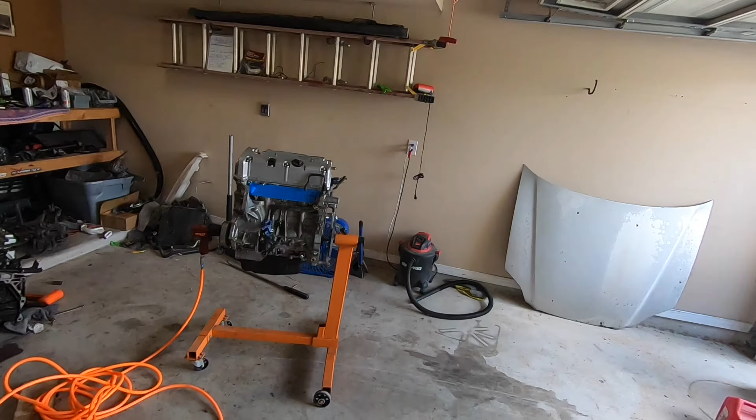What's up, guys? Today I'm going to do the VTEC killer setup, and I'll break it down step by step to the best of my abilities. That way I can help you guys who don't have a true VTEC K-series and then turn it into something that's what we call a VTEC killer, which rides on the VTEC lobe all the time.

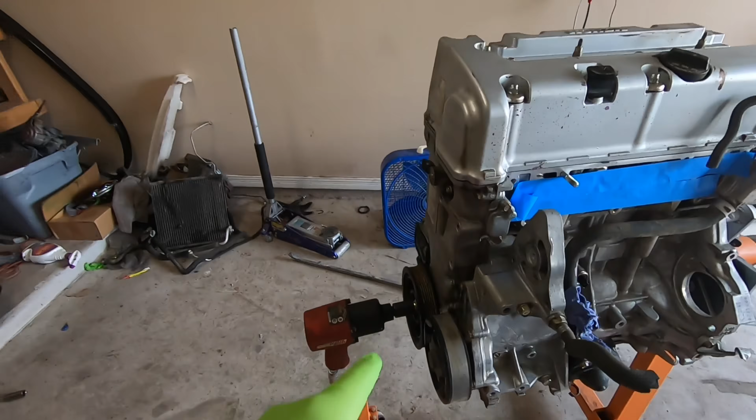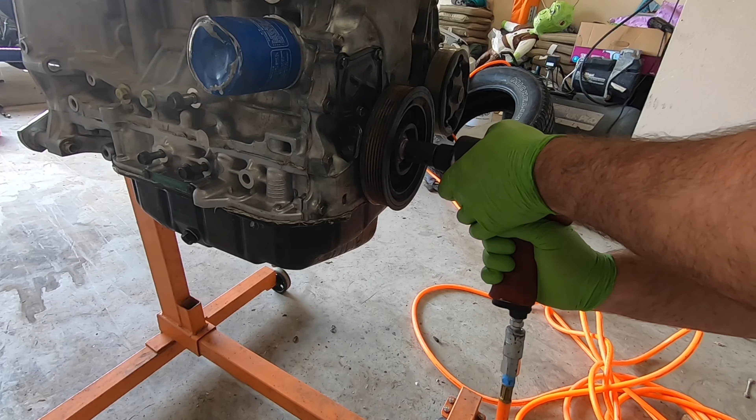So first things first, let's hope that the hardest part of the job goes smoothly. Got the air compressor pumped up, and I got the air gun ready to go. So first things first, we're gonna take off this crank pulley. That wasn't too bad. Air compressor for the win. All right, so we got that off. Wasn't too hard. We got the crank pulley. Just wiggle it. Some people I've seen have to pry it. I did not. There's a woodruff key, so you want to just be careful.

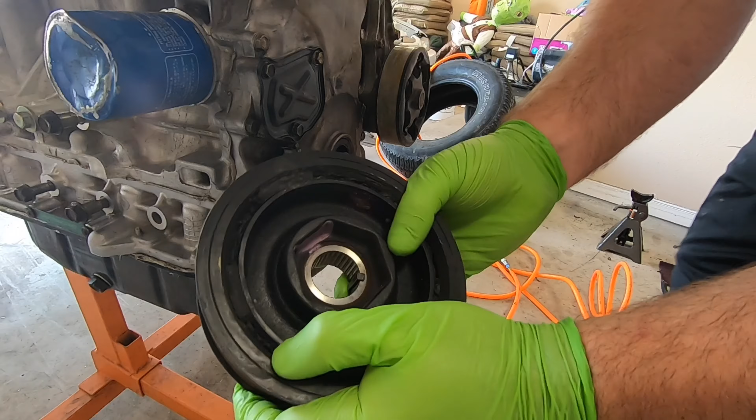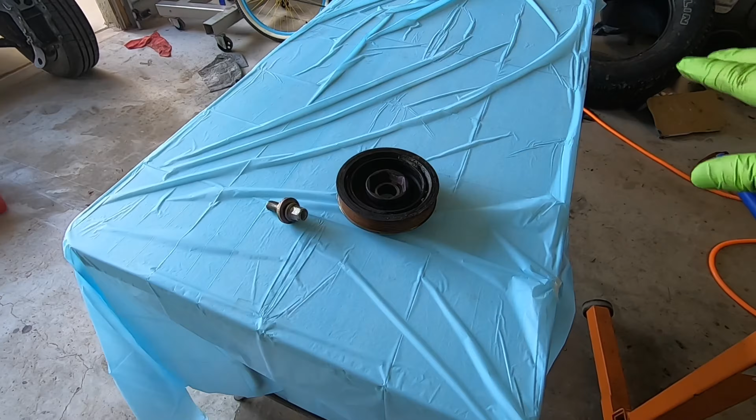And I set myself up with a very fancy tablecloth. I think this is going to help organize everything. I recommend, if you're going to tear down a motor like this, I mean, I'm not doing it too crazy, just the top end, but you still want to have some kind of organization so you don't lose stuff. So now that I got that off, I'm going to flip the motor.

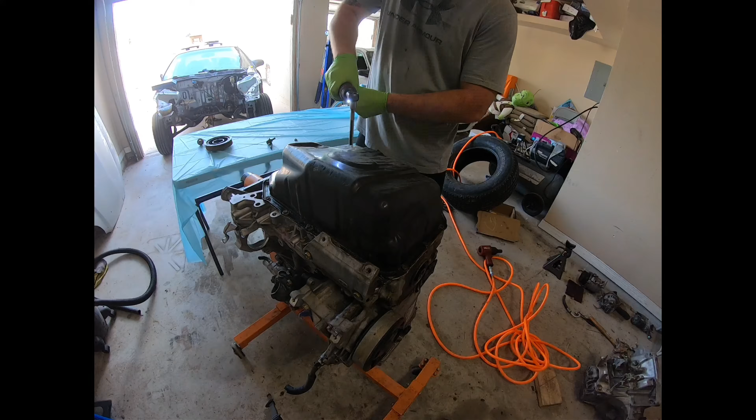And while I have the top end apart, I'm going to reseal this oil pan, because as you've seen previously, I actually took off the oil pan to inspect it. So I'm going to reseal this so that when I do put some oil in here, because I gotta lube the cams, I don't want any kind of oil to leak. So I'm gonna do that right now. All right, so as you can see, there's RTV all around the pan.

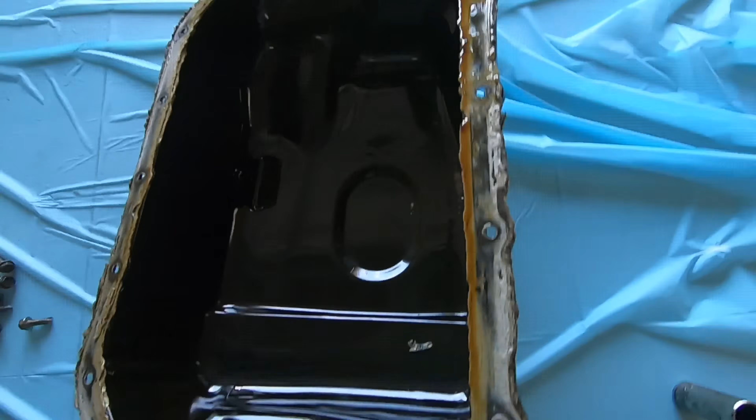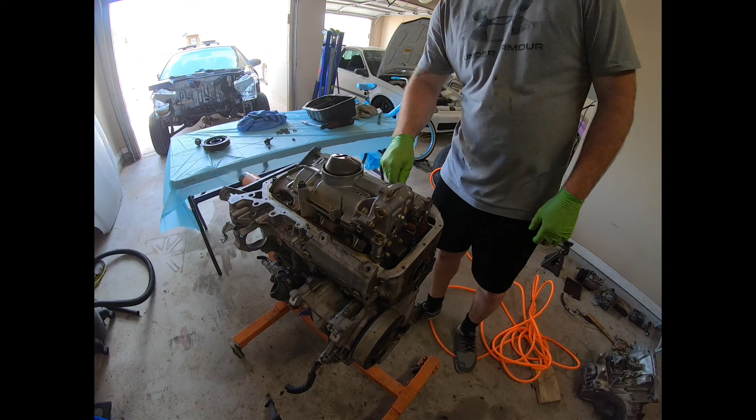So go ahead, razor blade all this off, clean it up nice, and then I will put back the pan. Actually, I think I need to keep the pan off to get this cover off. Poop. But I'll clean it anyways. I ain't gonna lie, I just spent I don't know how long cleaning the RTV off the oil pan. It was necessary, but I got it clean. So now I'm going to take off the valve cover.

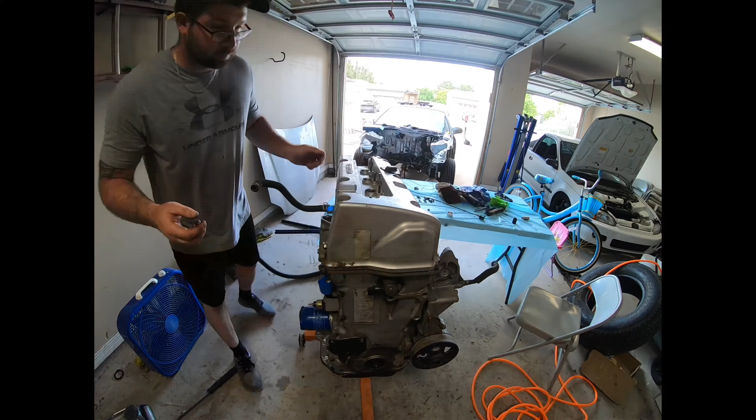All right, next I'm gonna do the timing cover. There's 12 bolts all the way around, and then the VTC solenoid. And you got the cover here, but it doesn't have to come off just yet. All right, so now I got the timing cover off, and I want to set the motor to top dead center. So I'm going to turn it counterclockwise until the timing marks match.

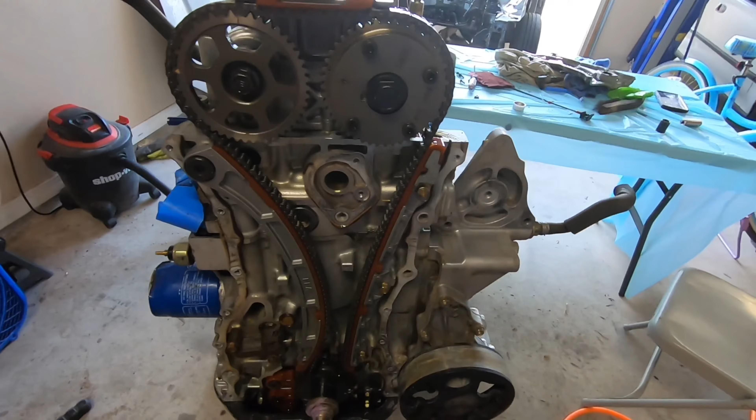I tried turning it. I realized I have tape covering exhaust and intake. It was causing too much pressure, made it really hard to turn. So, all right, here we go. Turn it over till we get these lines to match. So we got these two cross hatches matching.

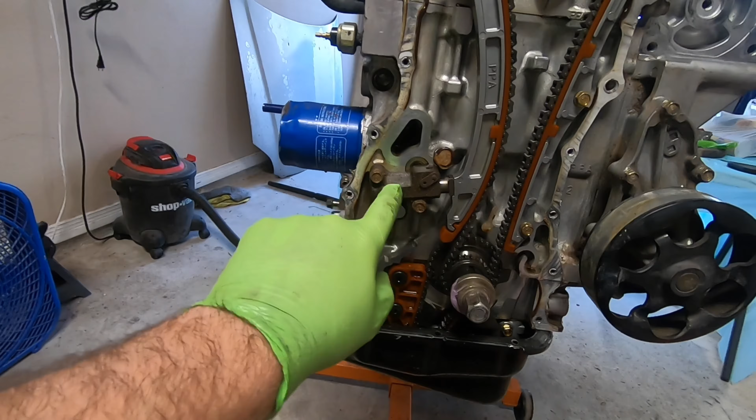Let's take it off the stand. Check where we are here. A little bit right there. All right, just double checking timing here. So we got these two lines matched up, and we got the arrows pointing up and down. So that's TDC. So right now I'm going to remove the timing tensioner, and I'm going to start working on getting the chain off, and after that we'll work on getting the cams off. I just ordered one from AutoZone and it'll be here tomorrow, but let's get to it.

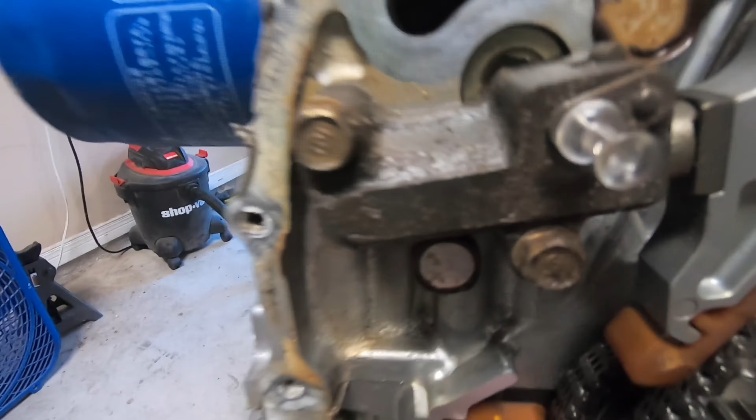All right, so next I got this little area lined up with a thumbtack in. Everyone says a thumbtack fits, so hopefully that works. Let's see. It's kind of hard with the one hand. All right, I'm just gonna loosen that and take it off.

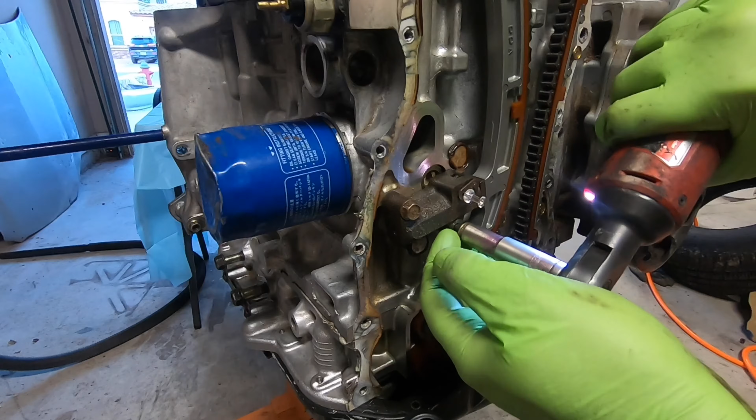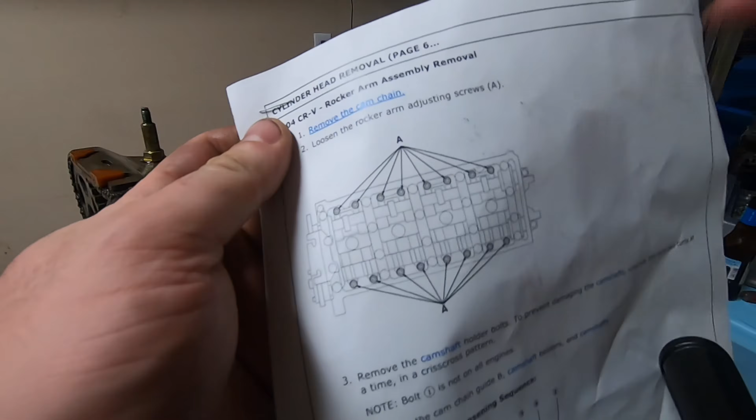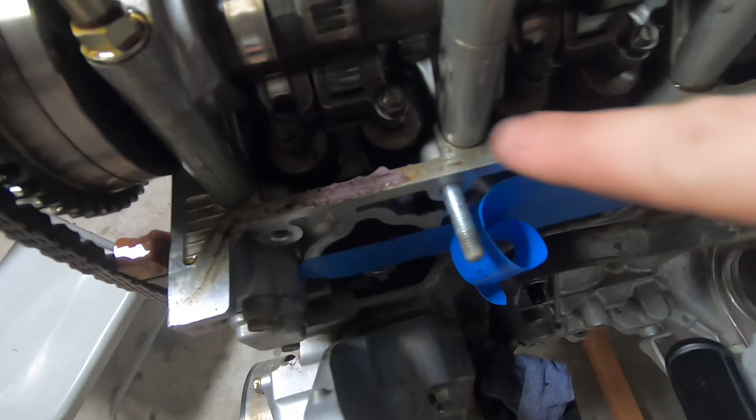All right, so according to the directions, it says to loosen the rocker arm adjusting screws. So if you ever did a valve adjustment, it is these on each part of the rocker. So I'm going to go ahead and loosen these. I don't know if it's necessary, but I'm gonna do it because it says it.

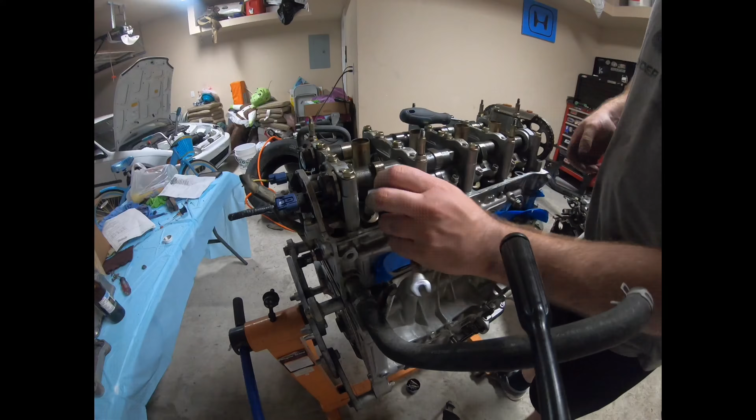All right, so next step is to follow the holder bolt loosening sequence. I don't know how good you guys can see that, but that is it. I will try to put a screenshot in there that way you can see it, but here it goes.

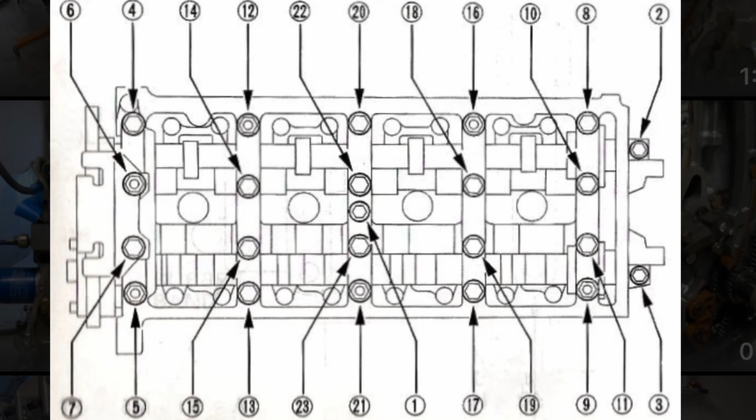Alright, so yesterday I left off, I loosened up all the bolts for the cam cap, and then my GoPro died. So now I will be removing them, removing the cams, cam gears, and then the bottom assembly for the roller rockers. Some kind of order like that. So let's get. Alright, so that's one. And they're all marked 1, 2, 3, 4, 5, so it's really kind of hard to mix things up.

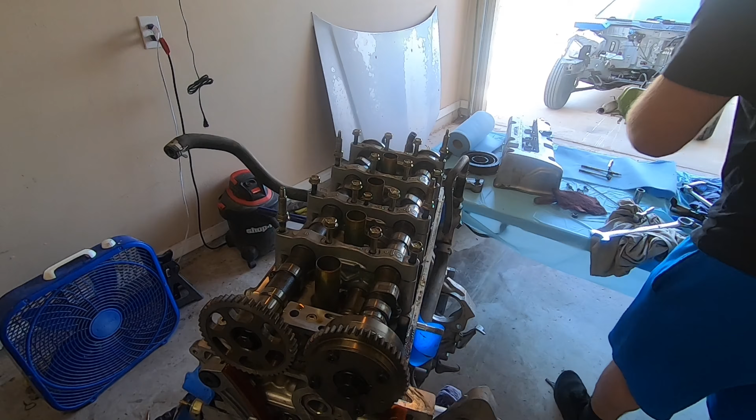Well, I elected to impact this off camera. Some people say not to impact it. I decided to impact it because I don't have any other choice. I think people say either way. It's not a big deal to me. I think it's gonna be just fine. So I'm gonna do the same thing on here. I think that's a 14.

All right, I got the 14 on the exhaust side. And I'm just gonna zap. It's a 24 wrench to hold the cam, by the way. And I got the cam gears. I don't think I will impact them back on. That would be silly. All right, I'm gonna get these cam gears off. Look how easy. I thought it was gonna be tough.

So that's the intake cam gear. And the exhaust. Same thing, real easy. Cool. So these cams are now done. Put them off to the side here.

So next, from my experience, these that are attached to the head are super difficult to get off. At the junkyard, I did not have anything to do it, but after looking online, it looks like if I just get a piece of cloth or something and a pry bar, they should come off. So I'm gonna get my cloth and pry bar and see how that works. All right, so this is kind of nerve-wracking. I got a ginormous pry bar and a t-shirt.

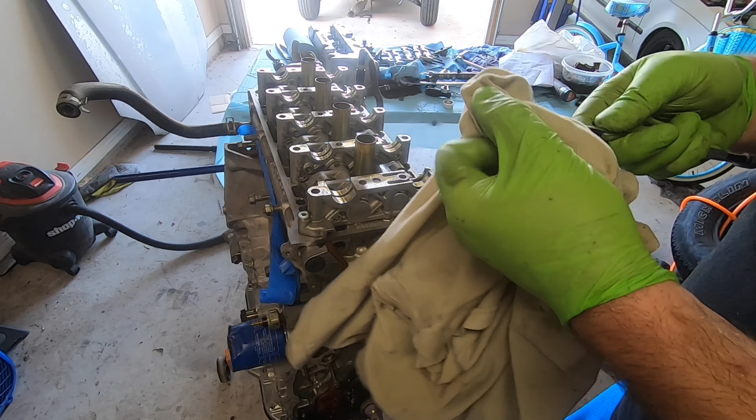It is coming up. All right, kind of at a loss as far as pry bars go. I have a 1/4 inch extension, kind of fits in there. Oh no, it marred it just a bit. See if I can work it on the other sides. There are better ways of doing this, folks. That is a fact.

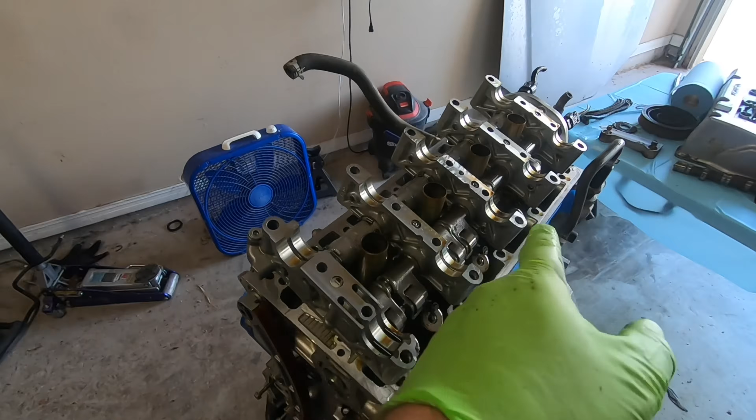All right, so I have it pretty much off, but I just want to explain how to get it off. So there's a place here you'll be able to pry, here, here, and also here. So what you want to do is just kind of pry them up in each corner and then just wiggle it, wiggle it, wiggle it. And it took a little bit more work for me because I don't have a proper pry bar, something I do need to get.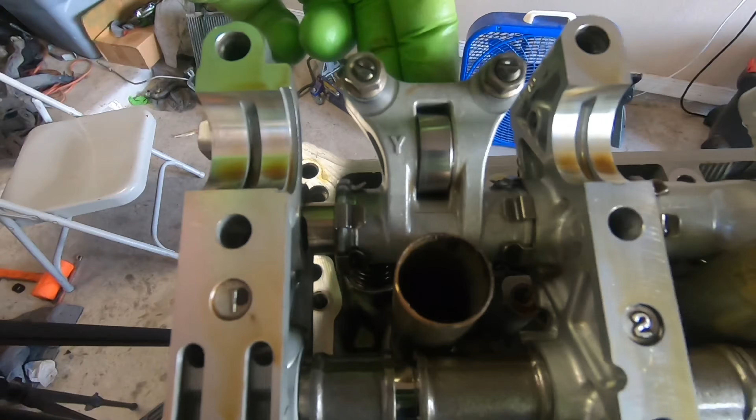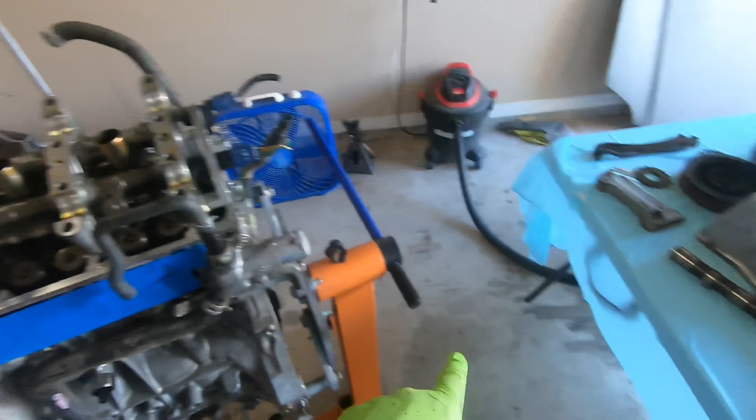When you're doing this VTEC killer setup, don't worry about the springs and stuff popping out of the roller rockers. They're not going to be reused because we are going with a complete set of exhaust rockers from the K24Z3 that look like this, and that's going to be on all 8 intake and exhaust, or 4 intake and exhaust, whatever you want to say. So let's get this whole assembly off. I need to clear some space on this organized mess, and we will start talking a little bit more about why we have to use those exact K24Z3 rockers.

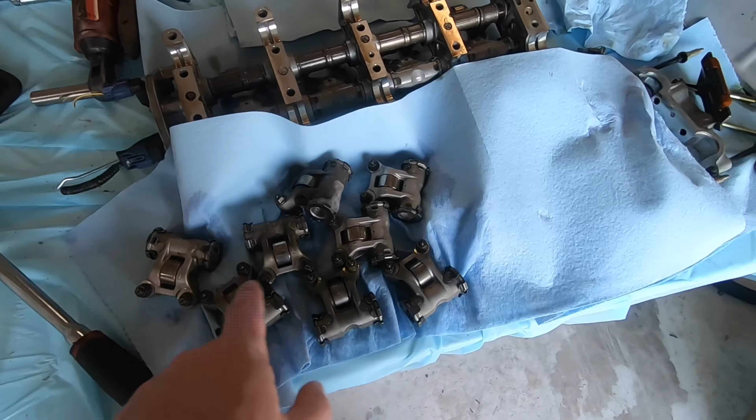All right, so I had these soaking in gasoline for like a day and a half just to cut any kind of grime, and then I just put some degreaser, like some dish detergent, and just ran it through there, and I'm letting it air dry. So now I'll kind of just talk about why we're using these.

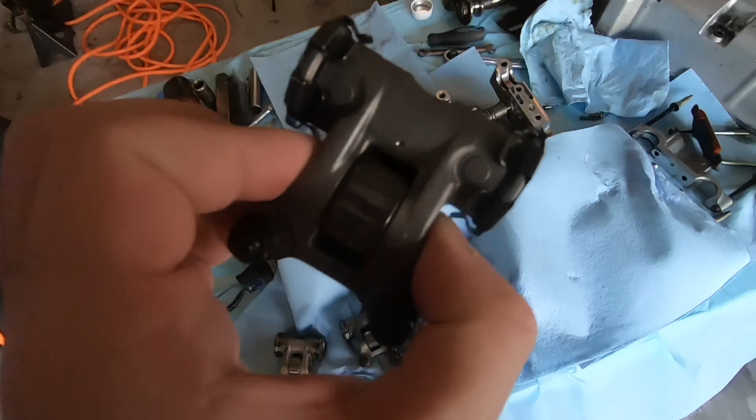So on the K24s and K20A3, it's not true VTEC. So in order to get it, we're gonna run one lobe on the exhaust side, with K20A2 Type S cams. The killer in this is we no longer have to have VTEC engage, but we're going to be riding on that high lobe the entire time. These rockers don't require any kind of grinding. They fit perfectly, and once we have the cams installed, you'll see it does clear these.

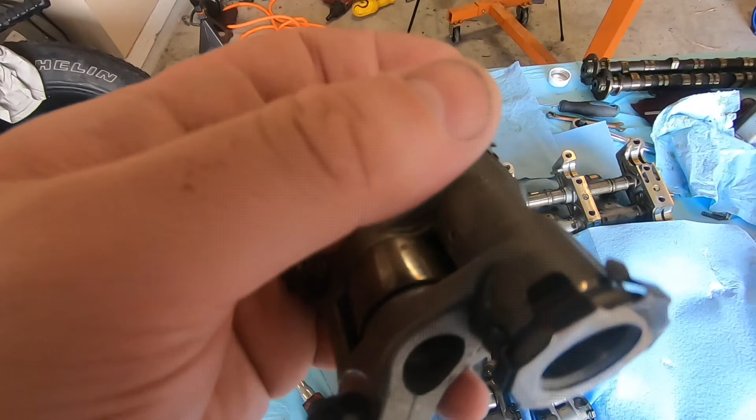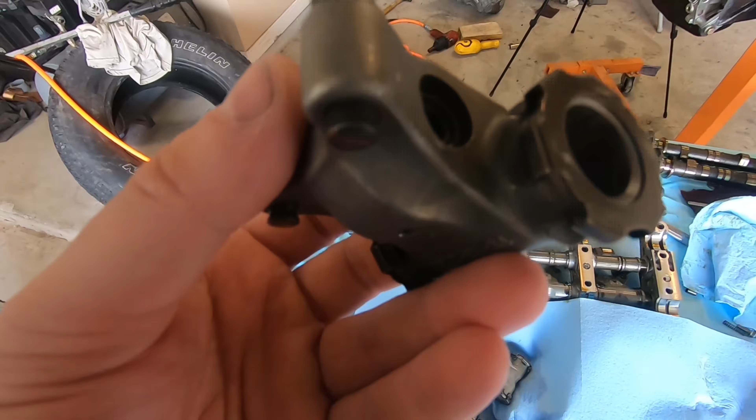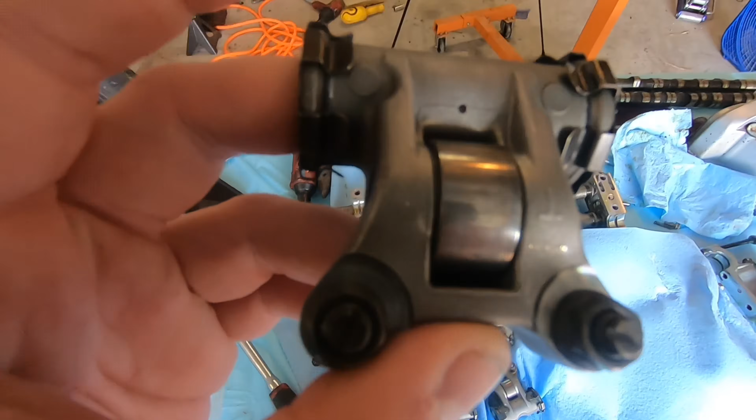Some people use the exhaust rockers from other non-VTEC engines, and you have to grind them. So I think it's like Accord EX from like 2011 and up. I'm not exactly sure on those years. And the second gen TSX uses the K24Z3. And you could find these pretty easy at the junkyard. I ended up having 4 that I got with the motor. They didn't charge me for whatever reason.

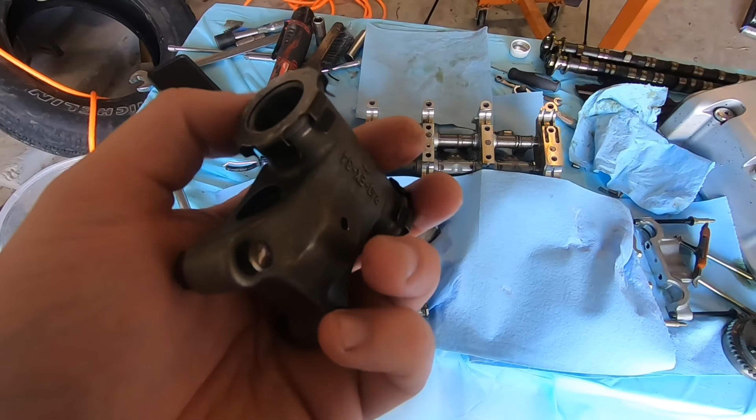And then another set of these were $7 each, so it came out to like 20 something. Just to get this in the oil has been a super tedious process. I started off soaking it in gas for a day and a half, like I mentioned. It still had some grit.

Then I went down to some soap and some detergent. That cleaned it up pretty good. Let it air dry for a good while. Then I took some brake clean, just sprayed around the rollers, turned them, let that air dry, checked them, verified they were dry, and now I have them sitting in 5W20.

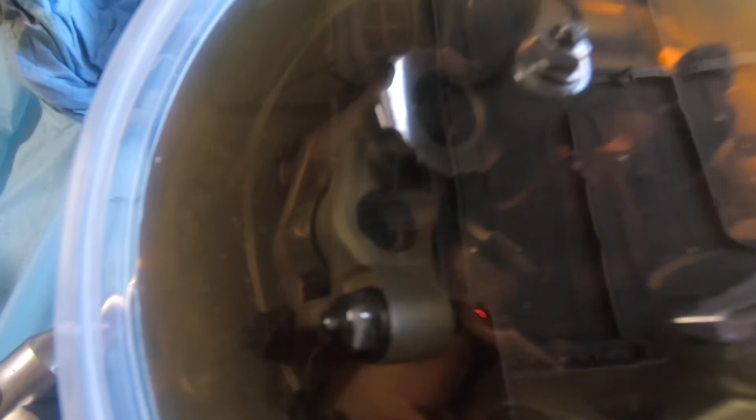And as you can see, let's see if we can capture some bubbles. There we go, some bubbles there. And that's just the oil filling up all these air gaps. So it's super important if you get these from the junkyard or whatever. In my case, they did get some grit in them. And in most cases, I would say you wouldn't, as long as the motor was taken care of and you put them in a bag or something.

But unfortunately, I didn't. So learn from my mistakes, but also it doesn't hurt to be overly cautious in cleaning them and oil them and all that good stuff. So I'm gonna let this sit for a good while. Once these I feel are good to go, we'll start working on assembling them.

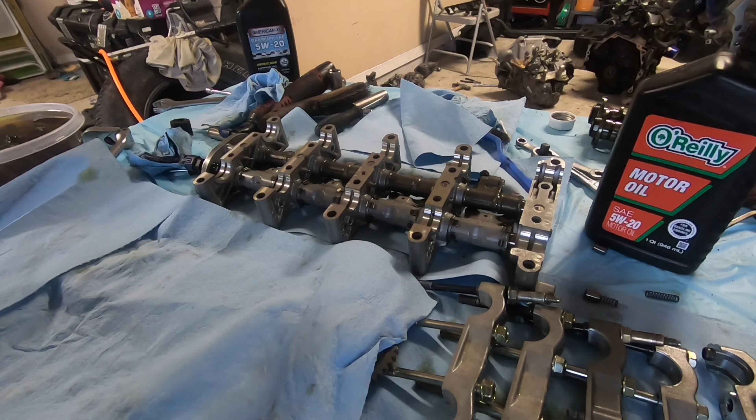So the rockers are pretty much nice and soaked. In the time that it'll take to do this, I think I'll end up taking it off. So I'm gonna take these apart. Like I said, they are labeled. And we're not worried about these or the springs because we're using all new rockers, and they don't even have the springs like the VTEC side does.

So just take off each holder. I'll just place it over here. Put all the assembly elsewhere, not like I'm gonna need it. As uniform as I can. Alright, so we have all the old stuff over here. Probably put it somewhere else. And then I'm just going to clean off all this and then start sliding everything on.

Alright, so I think the easiest way to go about this is to put the number 1 holder and just put some oil on it. Place

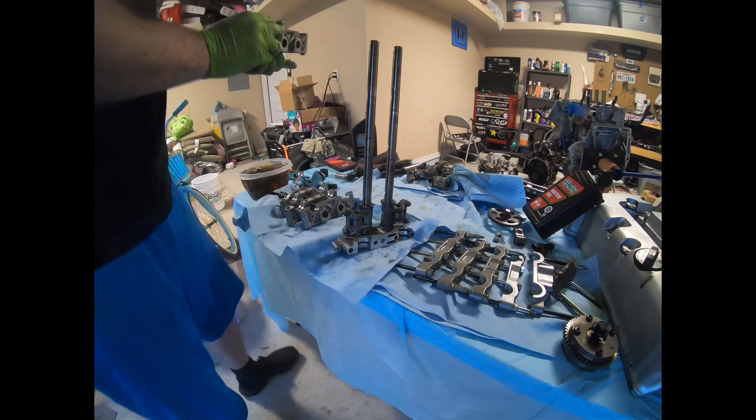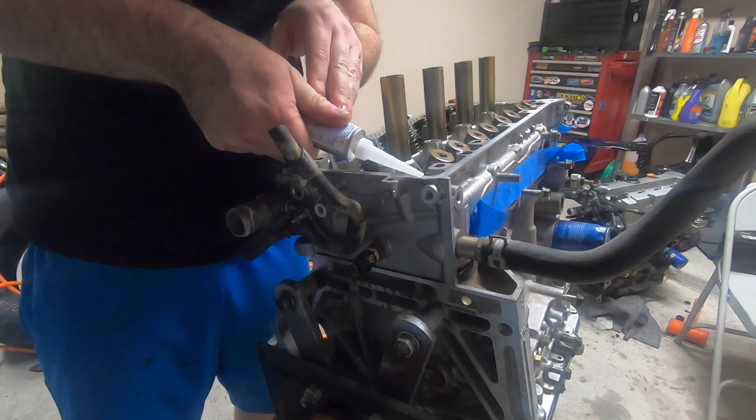for the number 5 cam rocker arm plate. So put a little RTV there. And the RTV, I'm not using Honda Bond, I'm using Ultra Gray Permatex RTV. It's basically the same. I don't need to be spending extra money on something like that when I don't need to.

I think we're just, oh, there we go. So we have it on. I think I'm just going to tap these in and I'll start torquing everything down.

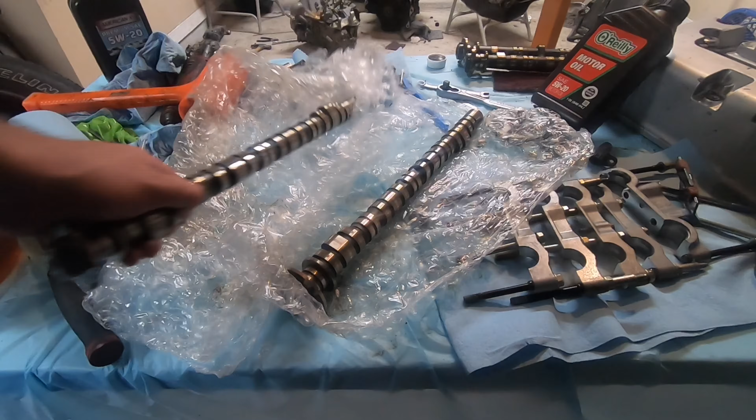So the next part of the VTEC killer setup is these 02-04 Type S cams, intake and exhaust. I got these off eBay without the cam gear, so I'm just gonna have to use the ones I took off. And basically what these do is give you that 3rd lobe, and this is the one we'll be riding on the whole time. You can use 04-05 TSX cams on stock valve train, but from what I've read and seen, the 06-08 is just too big and you might run into issues with the valve springs.

So your best bet is use some Type S's, or go ahead and upgrade the entire valve train along with some bigger cams, and that'll probably give you the most benefit. But for this setup, I think it's going to work perfect, and it's going to give us the gains that we're looking for. Alright, so I got the cam gears on.

The intake cam is 83 foot-pounds. The exhaust is 41 foot-pounds, and these end plates here, they're torqued down to 29 foot-pounds, and there's oil in the lens. So now I'm ready to put the caps on. Everything's lubed. I put oil all around it. That's very important when you're putting this together, is to make sure everything's properly lubed. So I'm gonna put the caps on now.

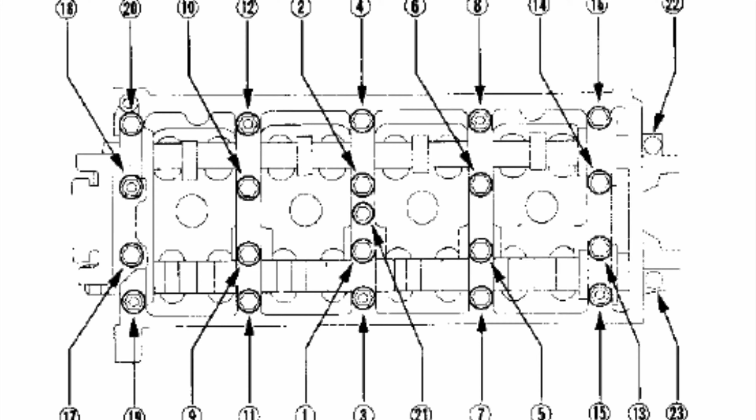Alright, so as you saw, everything was torqued in sequence. These two I didn't do because I don't know how I'm supposed to fit the chain with the guide there, so I'm not too worried about that. I torqued it and then I just double checked everything towards the end.

So I think now that the top end is done, I'm probably gonna set this to top dead center. I do want to spin it a couple times. I'm gonna put more oil on here and just make sure that nothing's hitting the rockers I just put in. So I'm gonna go ahead and do that.

All right, so I'm just about to put the timing chain on. I have the timing marks lined up on top. Down low, I have the cams locked in. I do not want to touch them because they're real finicky. So now I'm going to slip the chain on and hope it goes well. This is stressful. All right, so on the chain, there's gonna be 2 sets of black links, and you wanna match the middle of these links to these dots up top.

Next, I'm gonna put the tensioner on. We already verified the timing marks. We'll put this on. This isn't anything fancy. I got this from AutoZone. It's a Duralast tensioner. Hopefully it does exactly what we need it to without breaking. All right, so the tensioner bolts are 8.7 foot-pounds. I got as close as I could.

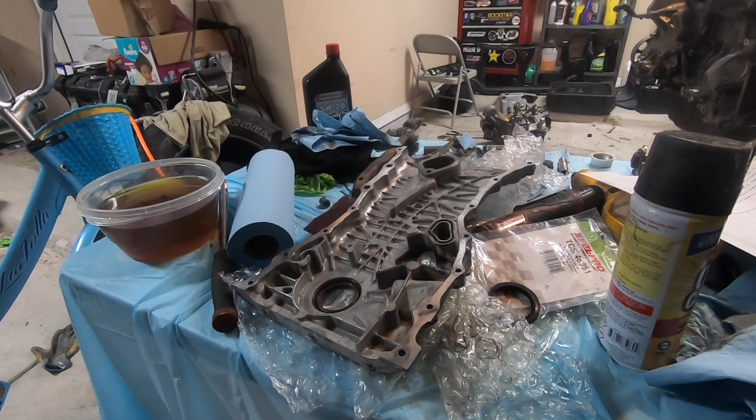So now, I think we pull the pin. The tension's set, and we'll just push this out. And I think now, we can turn the motor over and make sure everything's in time. Holy crap. All right, so now I'm going to apply the RTV along the timing cover. I'll probably just show you a screenshot. That way you have an accurate idea of how it's supposed to go. So I'm gonna just go ahead and apply it.

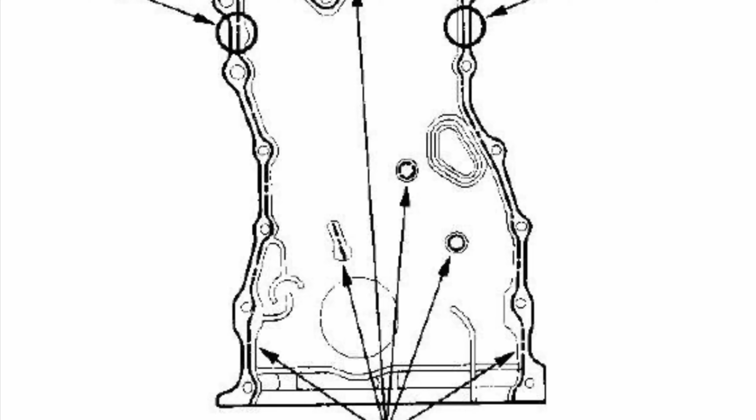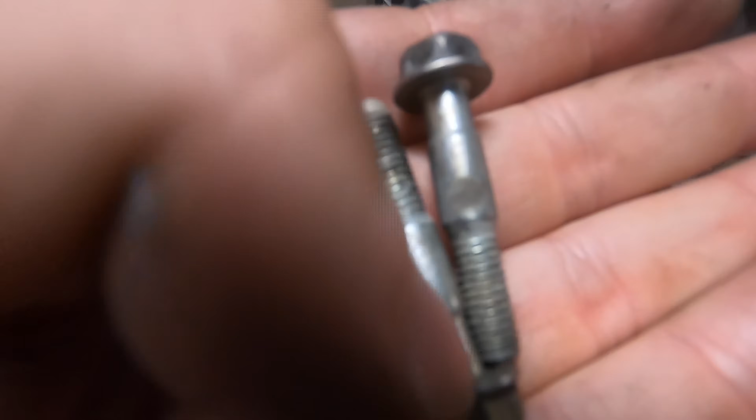So I've got the timing cover on. The bolts aren't tight yet, but I just want to point out that these 2 thicker ones, see how this kind of bulges out? They go specifically on the bottom here. Other than that, they're all the same. And then the VTC bolt is real long like this. So just keep that in mind when you put it back together.

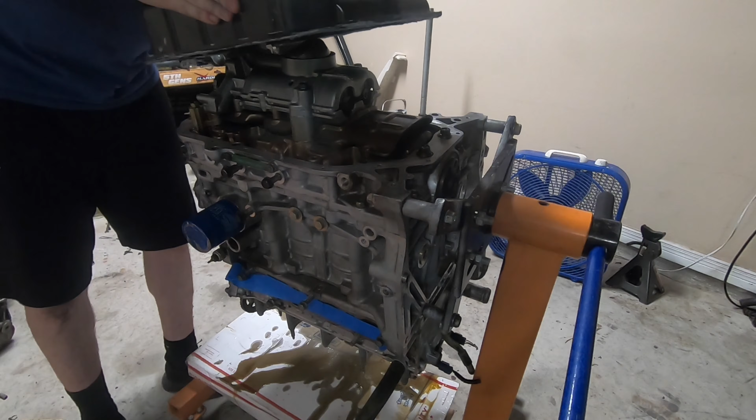All right, so next, got the oil pan. Pop it up here. Got 2 studs that'll line it up. All right, now I go ahead and put all the bolts in.

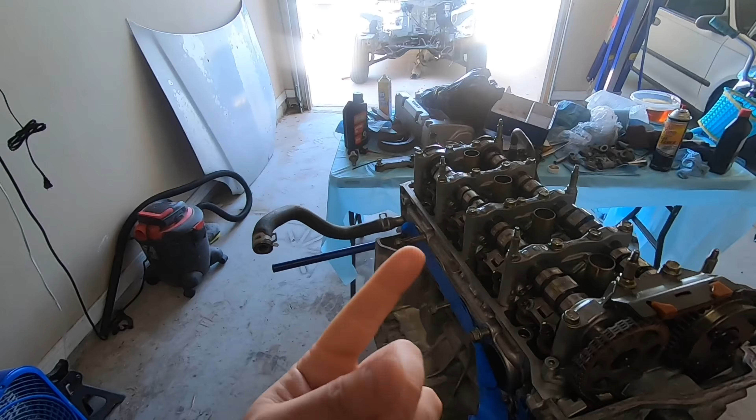Alright, so it's been a couple days. The RTV has now dried, and now I'm going to go ahead and adjust all the valves. I'm not going to show you how to do this because I actually have another video that explains how to adjust the valves. I'm going to put it somewhere up here. So if you want to know how to do that, I have the video for it. I'm going to just do it on my own time and pretty much finish up the job.

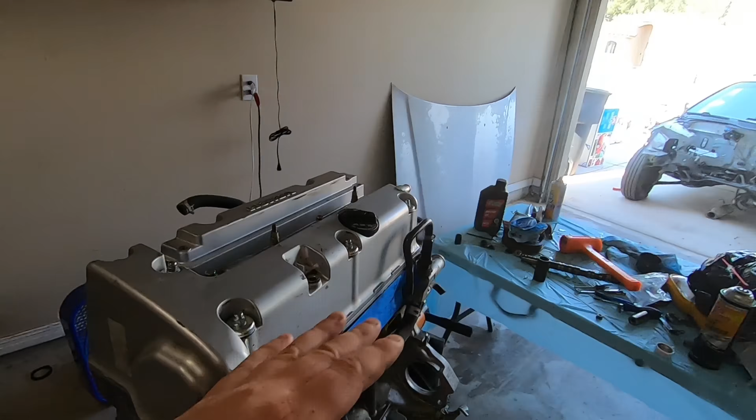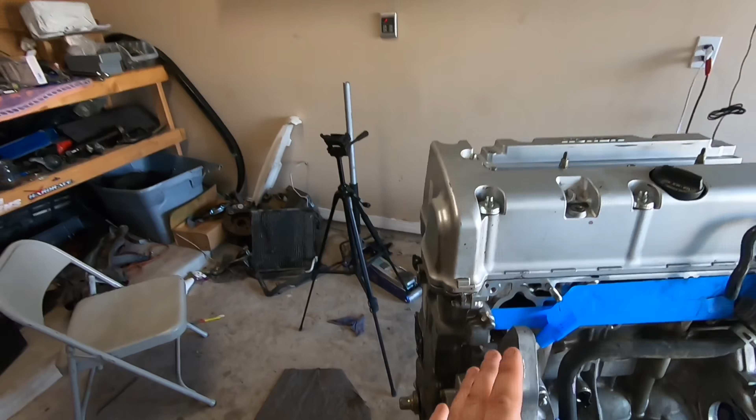Alright guys, so valve cover is on. Everything's adjusted, so it's pretty much done here. So just to recap this entire thing that we did, we got K20A2 cams, K24 Z3 rockers. The whole point of this is to get VTEC pretty much all the time, which is called the VTEC killer setup. New tensioner, the chain was good, everything was adjusted and cleaned, and gaskets were replaced. Timing cover gasket, valve cover gasket, spark plug seals, RTV all across the board, everything good to go.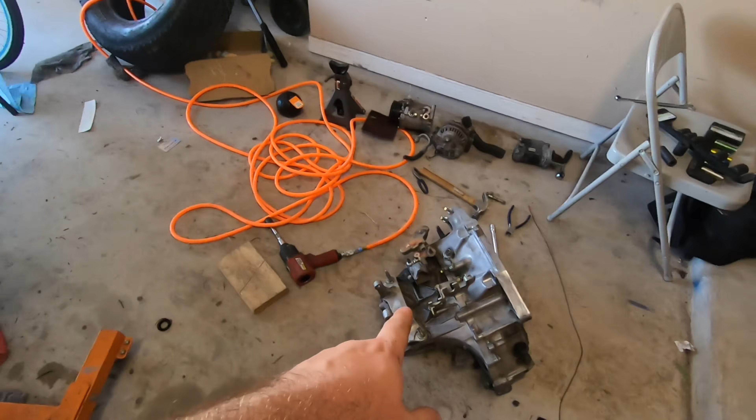I think the next step I got to do on this block is to clean it, and I want to paint it just like I did on the EG. It's pretty much clean, but there's just some little areas that need to be finished. Same thing with the transmission. So I think next video, I'll clean it on my own, but as far as painting and everything, I'll probably paint it and mate it. Yeah, I know that rhymed. Because I do have the clutch kit now.